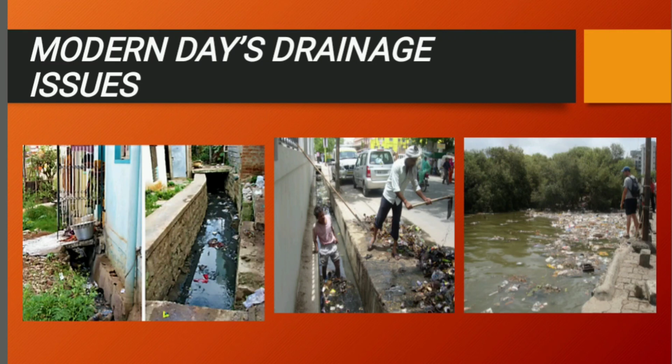Cleaning of drains has always been a problem. Laborers cleaning drains is unethical and also leads to a high risk of them catching infections or poisoning due to large amounts of waste or chemicals in them. Also, throwing of bottles or plastics and other such objects into the drains leads to narrowing and eventually blockage in drain flow. This leads to overflow in many cases.

So here we provide a fully automated drain gutter cleaning mechanism to tackle these modern day drain jamming issues.

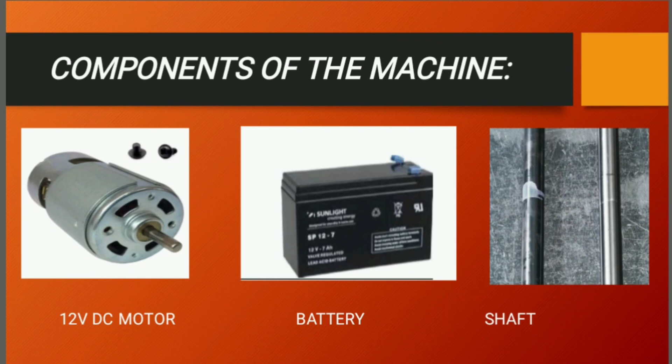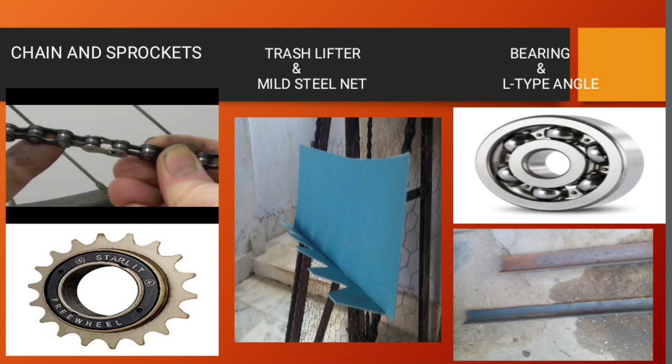When coming to the main components used in this system, they are a 12 volt DC motor, a battery, shaft, chain and sprockets, trash lifter, mild steel net, bearing and angular plates, and also an inclined tray. The machine is based on angular frames which are joined using arc welding.

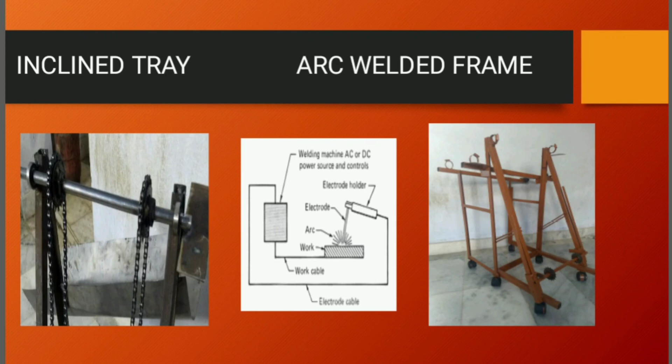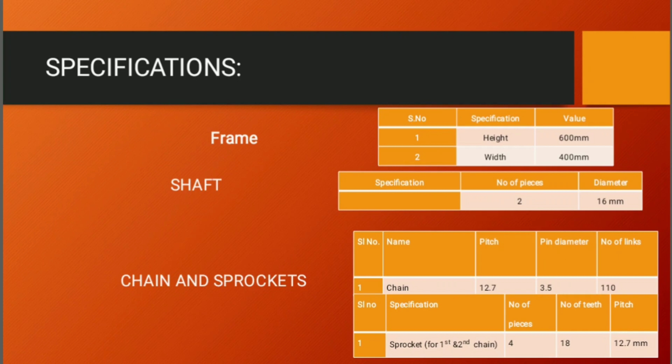Here you can see the specification of the components used in our system: the specification of the frame, the specification of the shaft, and the specification of the chain and sprockets. And here you can see the specification of bearings, motor and battery.

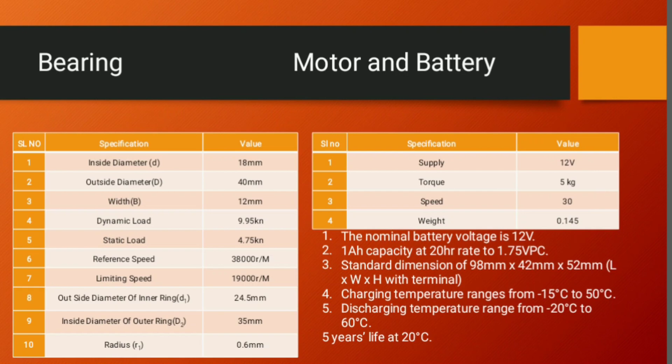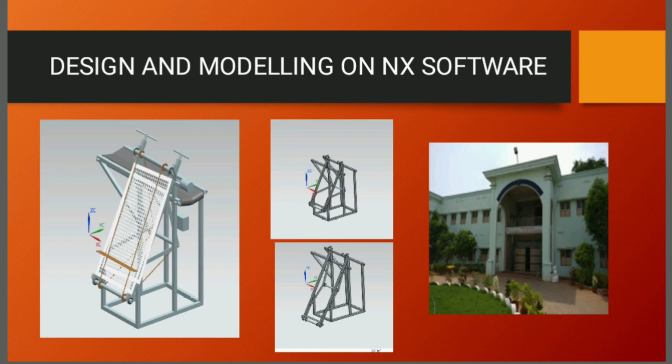Before we began the fabrication process, we first designed a model on NX software with the help of the Siemens Center at our college. And we did the fabrication as follows.

We first cut the L angle plates and then joined the frame by arc welding, then we fixed the chain and the sprockets, welded the lifter, fixed the motor, greased the chain drive, fixed the net, and also applied anti-rust paint to the frame.

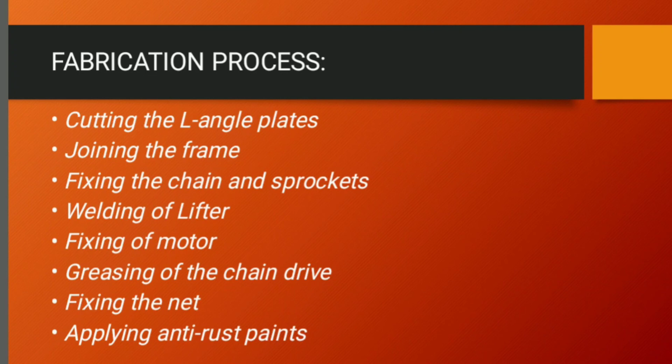Now let us go to the working principle of the machine. First, the machine is held across the drains. As we start operating the machine by battery, the motor starts to rotate and transmits power to the shaft, which makes the shaft rotate, and in turn the sprockets also rotate.

Hence the chain attached to the sprockets also starts to rotate. As the trash lifter is directly attached to the chain, it also simultaneously rotates. This rotating lifter lifts the scrap which was floating on the drains.

The lifter drops the waste onto the inclined tray attached at the back of the machine, and due to the inclination of the tray, the waste drops onto the dustbin placed beside it. This is the overall working of the machine.

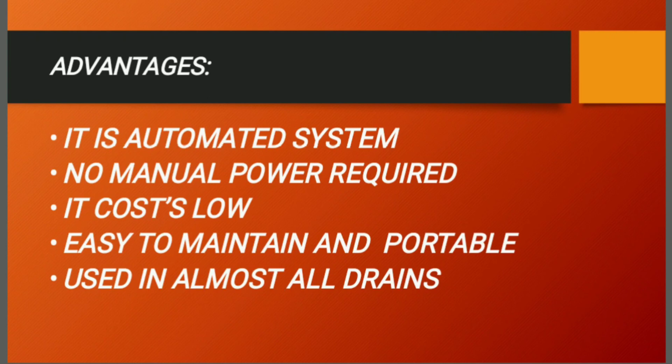Let us also see some advantages of the machine. The main advantage is that it is an automated system. No manual power is required. It costs low, is easy to maintain, is portable, and can be used in almost all drains.

By lowering the bottom shaft, the depth of the frame is increased, and both the links adjacent to either side of the shaft help achieve this mechanism, so that we can increase the depth of the machine in case of deep drains.

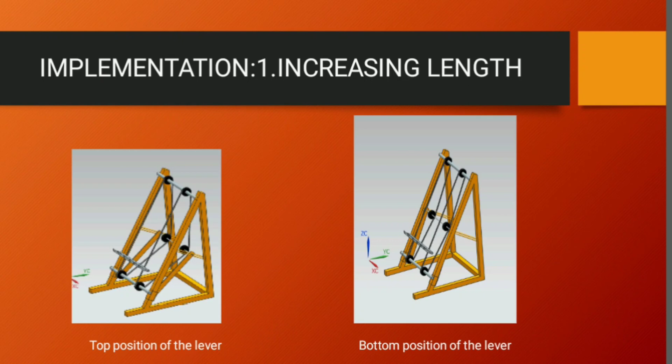And also, we can replace the inclined tray with a belt or chain conveyor, as you can see here.

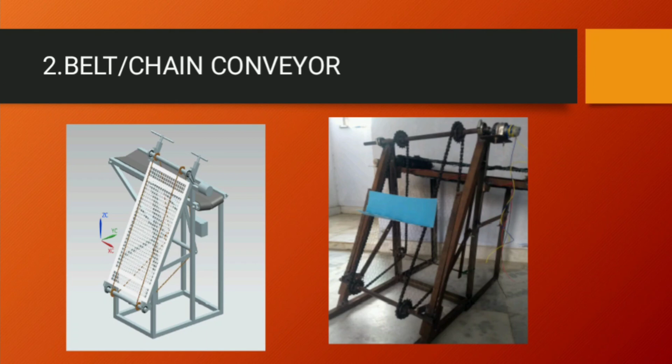Coming to the most important part, the applications of the machine: it can be used in almost all types of drains, it can be used for cleaning small canals, and it can also be used in some industries. Thank you.